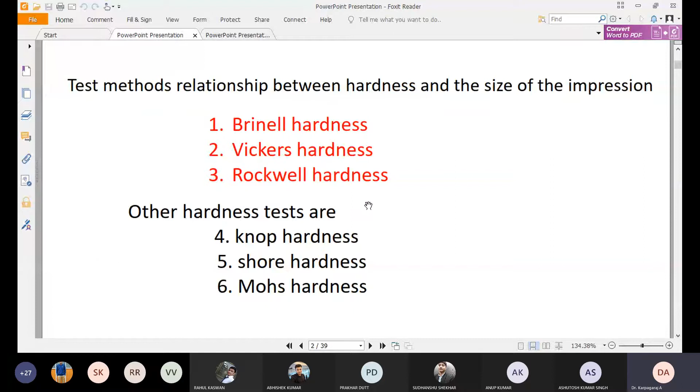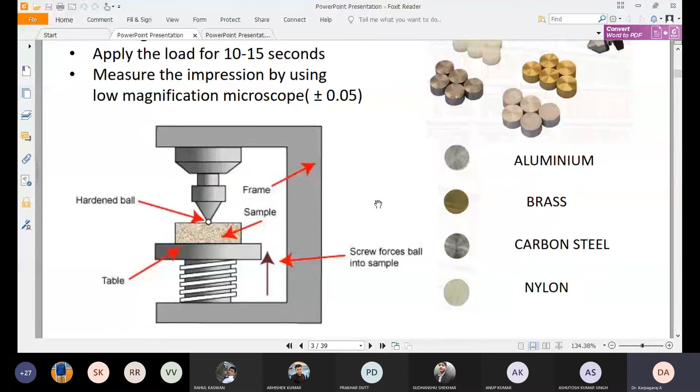So, Brinell hardness, Vickers, Rockwell, I think you have performed in your lab. For Brinell hardness, we have the load setup, and a small table which can rise and go down. On the table you have to put the samples. Then we have a small ball which is a carbide tool, because we need a hard material so that the ball will not be damaged or deformed when engaging with aluminum, brass, and other materials.

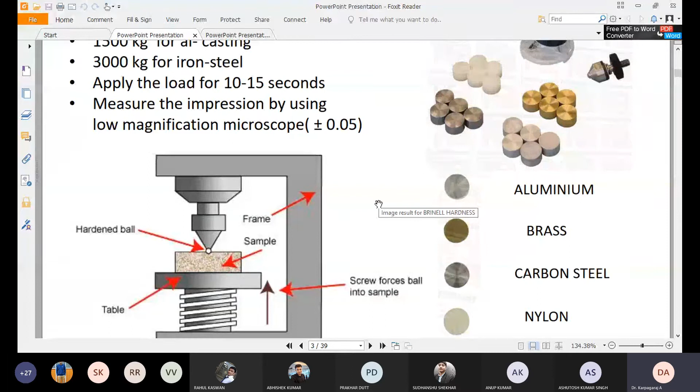So, by placing the ball for a certain time with respect to the load - for soft material you can use 500 kg, for castings and other things you can use 1500, but for harder material like iron or steel, you may go for 3000 kg.

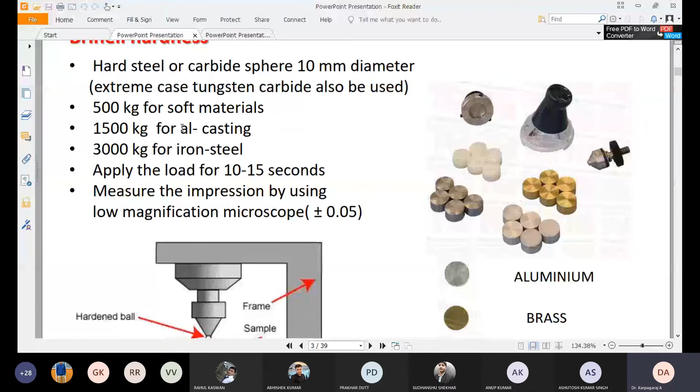It depends upon the material, and the dwell time is how long we have to keep the load for a certain time. If you keep the load for too long, it will penetrate much more and the diameter may change, because after making the indentation you have to measure the diameter using the eyepiece or microscope. Then you check the diameter, and slowly put it in the formula to get the hardness.

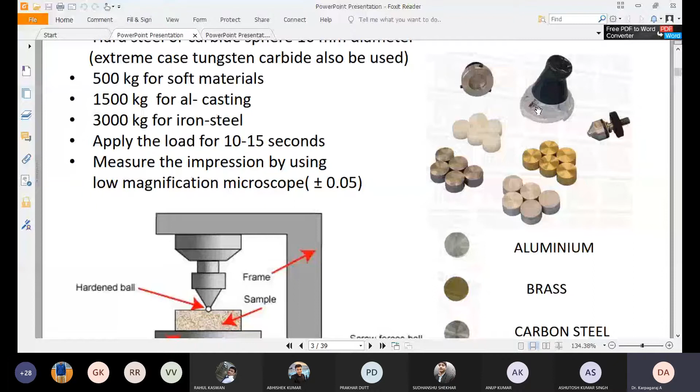This is a small idea: D is the diameter of the ball, F is the applied load, and D1 is the diameter of the indent - after reaching the surface of the product, how long it was dwelled, and how much was penetrated, that's the new diameter D1. So just put it in the formula: force divided by D times bracket D minus root of D squared minus D1 squared, and you will get the Brinell hardness number.

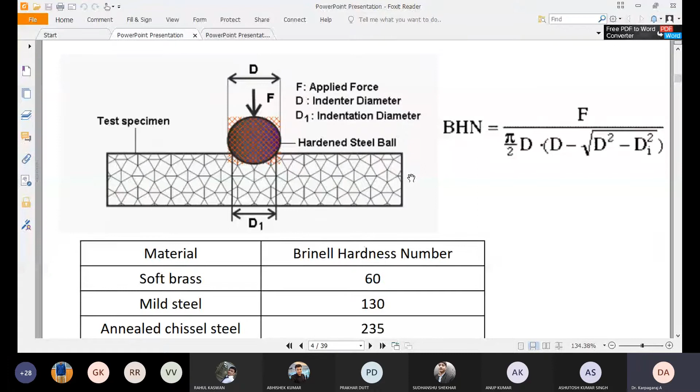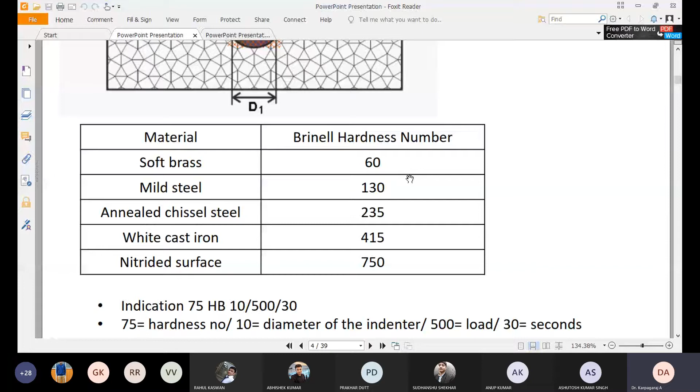There are some standard hardness numbers available for certain materials, and if you are measuring the hardness for your material, just check whether it's coming out correct or not. That's also one of the exercises.

So we have to write it like this: 75 HB 10/500/30. That means 75 is the hardness number, there's no doubt. 10 is the diameter of the indenter, and 500 is the load you applied. 30 means how long you applied it - 30 seconds. It depends upon the material, and it's a standard procedure for how you write the hardness number.

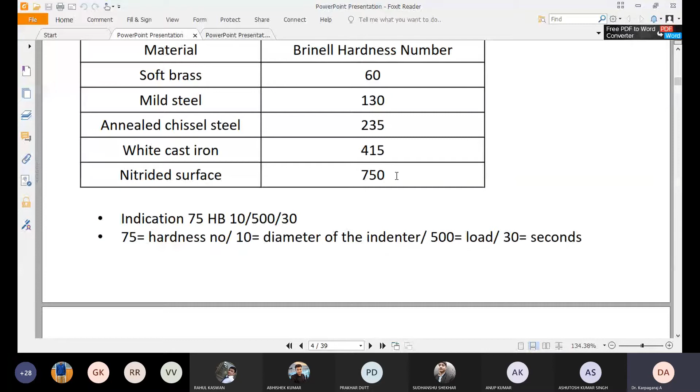For example, if you are writing the tensile load or other things, you will put MPa, megapascal, right? Similarly, you have to write like this for Brinell hardness number.

For measurement, sometimes if you don't have any analog devices, you can directly engage a specimen in the computer so that you get a computerized image, from which you can measure the diameter accurately.

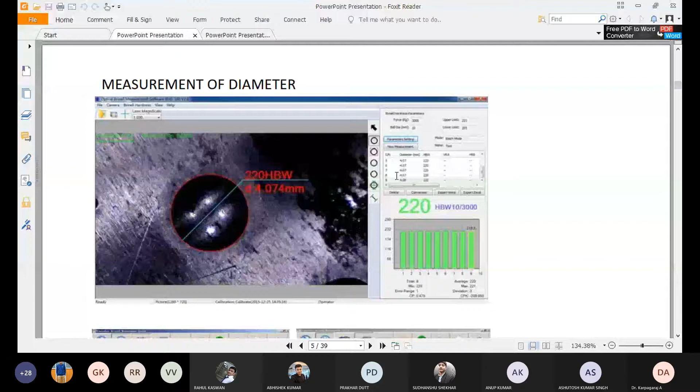So, is the Brinell hardness number test working in our college? Strength of materials lab - did you make it or conduct it or not? Yes sir. So what hardness number tests have you made? Sir, it was conducted last year, so we forgot. Oh, last year you forgot. Okay, very nice answer.

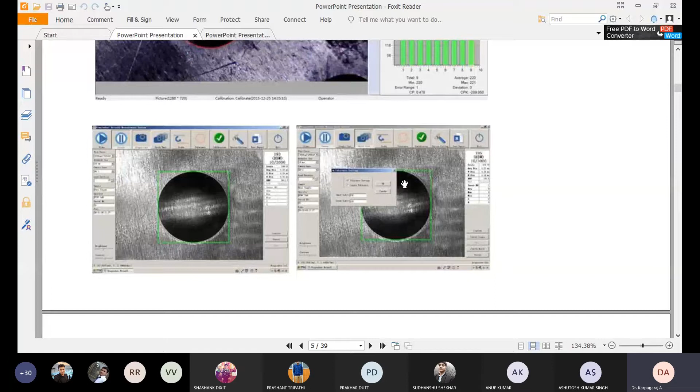So if you are unable to measure the diameter, you can make rectangular boxes and measure the side of the boxes, which will give the diameter. That option is also available in the optical microscope - you check feasibility and take it out.

So why are hardness numbers measured? Where do we measure, and what is the significant outcome and implementation of Brinell hardness numbers? Here in the example shown, it is an induction hardened sample - most probably a gear tooth.

In the gear tooth we need a hard surface in the outer layer, not the inside layer, because gears are rotating parts, and rotating parts generate vibrations - like in automobile, suddenly we engage some gears with another, and heavy vibrations take place. If it is so hard, it means higher wear resistance, so that's okay. But what about the low transmission capacity?

Higher the hardness means higher the brittleness. So if vibrations or shock loads are given, it becomes number of pieces - they cannot withstand the applied load or shocks. So for that we need a soft core, but outside should be rigid and brittle.

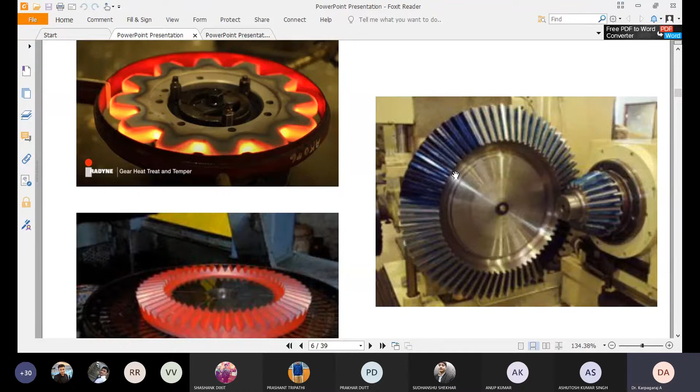Inside it will be soft, so sudden loads, vibrations, shock loads - anything that happens can easily transmit from one place to another without becoming a crack or causing defects. For this mechanism only we are checking the micro hardness at this surface level only. If you want to see the micro hardness for a particular section, you have to extract the section from the component, then measure the hardness.

So next is the Rockwell hardness. In Rockwell hardness, there are two things to remember: we have major load and minor load. In the minor scale, first we have to make it - like in drilling operations, before we drill, we have to make a punch. After that only we pass the drill.

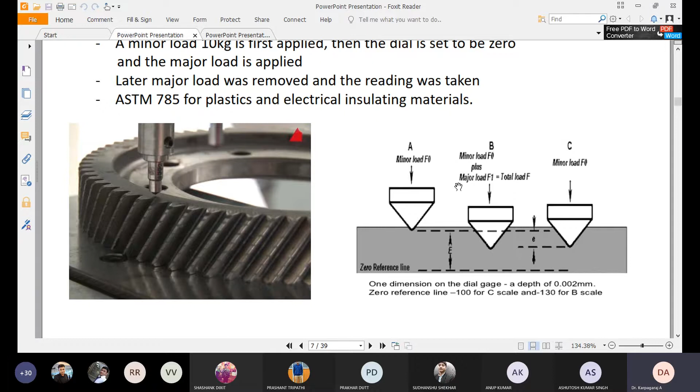Similarly here, we have to apply the minor load. After that, at the same location, same pinpoint, we apply the major load. Then we find out the depth e, put it in the formula, and we get the result. The ASTM standard is 785 for plastic and electrical material, don't forget. For metallic materials also we have ASTM standards, go and find it. Otherwise I will simply ask for ASTM standard based outcomes, and that time you may be in trouble.

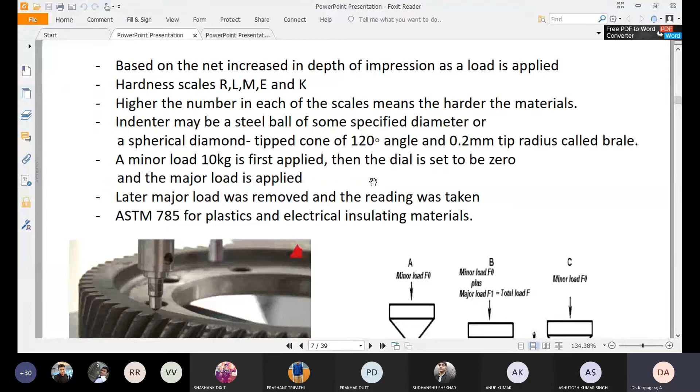So we are using a diamond tip. Last time we used the ball, but here we use diamond tip, with an angle of 120 degrees, that's it. So we have the scales R, L, M, E, K. These are the scales we will see in upcoming slides - what are the scales and other things.

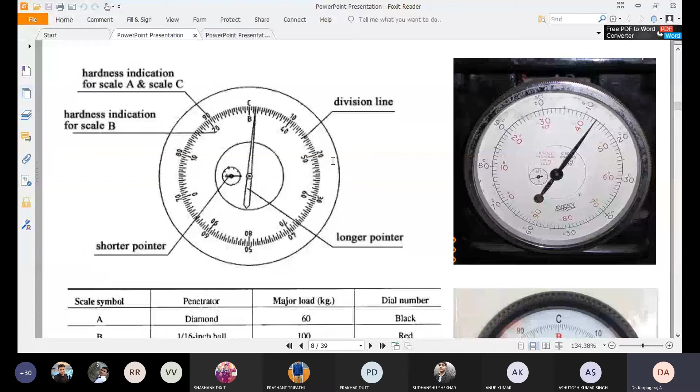And here only you can see A, B, C - the divisions will be over here. One will be minor, another will be major scale. As you can see, one will be in red color, another in black color - outer scale and inner scale, minor scale. Basically, you can take, no problem.

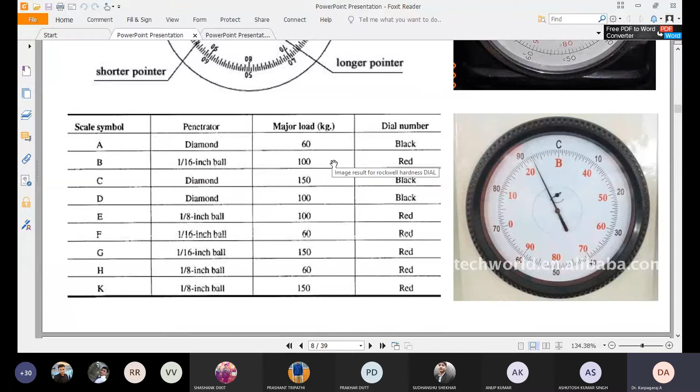Then depending upon the penetrator and the load capacity, you can take which scale you want. Because the load applying capacity and the indenter and everything is based on the material you're going to test. We are not going to fix it, the material is going to fix it. You have to select the proper choice for the material, otherwise you will not get the exact hardness number.

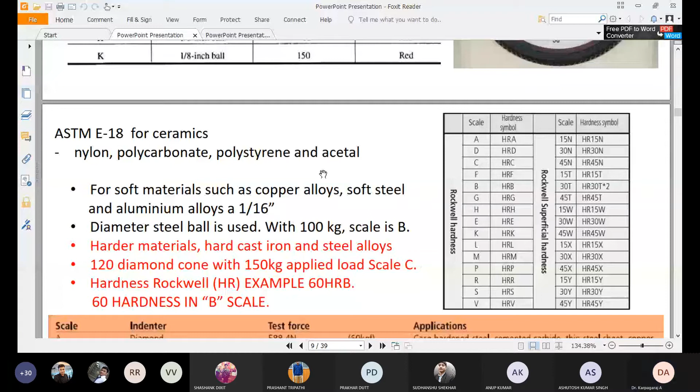So if you are using scale A, it's HRA, hardness of Rockwell A. D means HRD, C means HRC, likewise it will go. If you say scale 15N, it means HR 15N - that number also you can put in. Like last time, some numbering items, we have to do. And the scale, indenter and their scales are given, test force, the standard one, and the applications are shown over here.

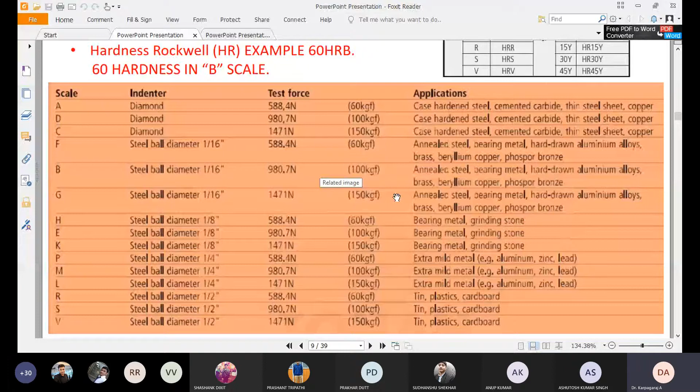Maximum that is 150 for annealed steel and other things.

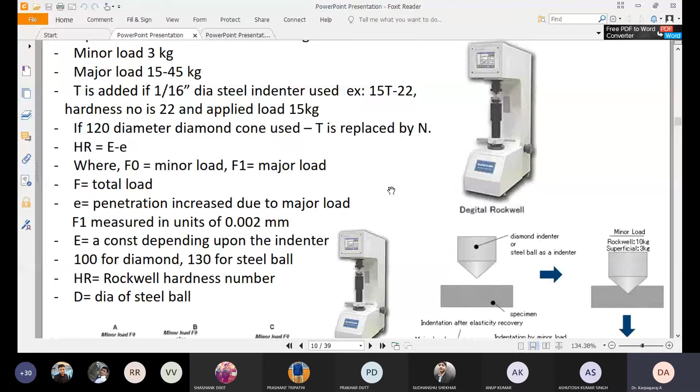The same, a little bit advanced version - here also we can have computerized Rockwell hardness machines where we can directly measure the hardness after giving the indentation. First you give the major load, minor load and other load conditions. Only thing is, we have to raise and lower the bed - just place the sample, raise the bed, put the items in the control panel, and slowly it will take the reading.

Now the third one is the Vickers hardness machine. In the Vickers hardness machine, we are using a diamond indenter. The load capacity may be 1 to 100 kg if they're saying, but normally it will start from 50 g up to 500 g we can apply the load. Dwell time may be 10 seconds to 30 seconds - I have used that, but if you want, you can increase more than that also. This Vickers micro hardness is specially used for industry purposes.

The previously seen method is normal hardness testing, used in school, college level and normal purposes, academic purposes. But for research and industry level, we have to use R&D level, the Vickers hardness machine, which gives a clear-cut relationship with the microstructural changes, grains and new phases, etc. Because previously what we've seen is macro level, not micro level, but this is micro level.

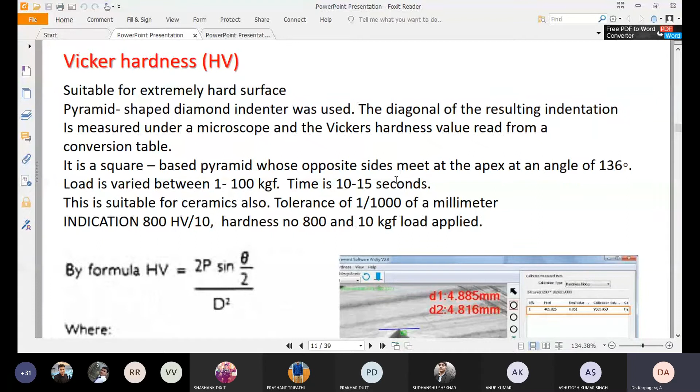Because what we're going to do is measure the diameter diagonal. The diamond indenter is like a pyramid shape. So diagonally we have to check D1 and D2, and then put D1 and D2 into the computer or pre-defined program, and it will give the hardness. Next slide you will see the effect of diagonal reading in the micro hardness.

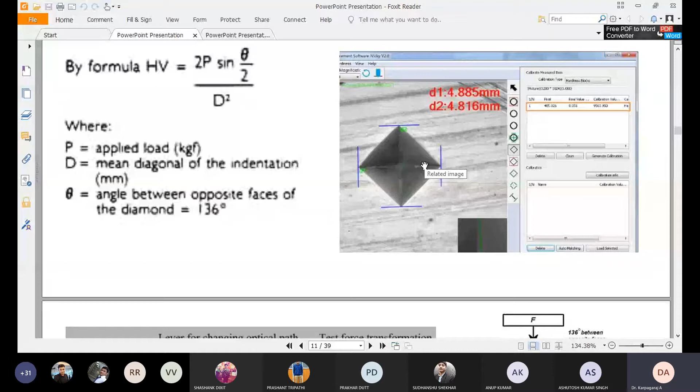This is the Vickers hardness micro hardness machine. We have a table and two XYZ movement screws. This is for load applying, power plug, and working platform. Hand wheel is for changing the load. Another hand wheel is for raising and lowering the bed.

With the same machine, if possible, you can change the diamond indenter. Sometimes you use Vickers, another may be Knoop. Digital screens are available. After taking the micro hardness, you can measure how much diagonally D1, D2, using the optical microscope lens already attached to this machine. After that, you have to enter the D1, D2 values in the controlling working panel.

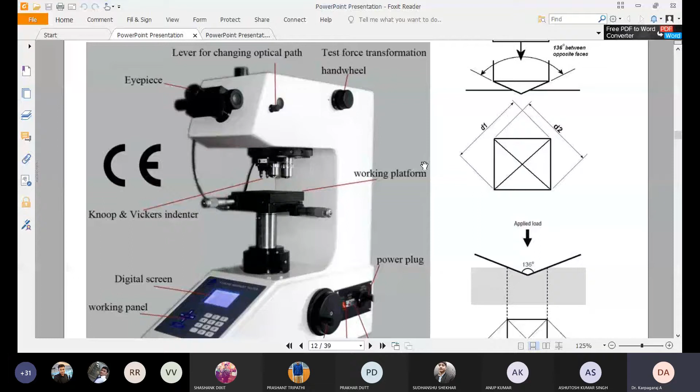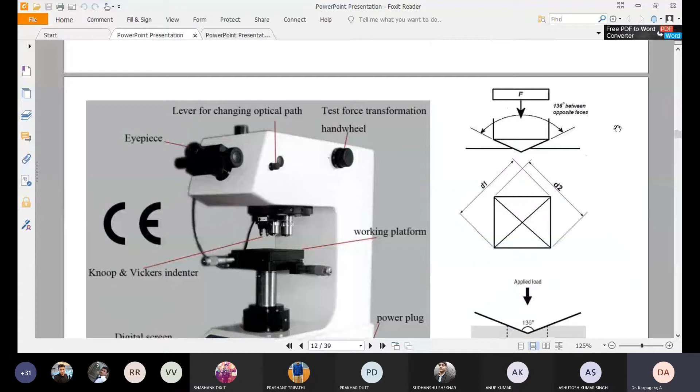Then it will give the micro hardness value on the display, and you can directly measure it. This is how it works. On the right side, F is available, so the diamond indenter at 136 degrees penetrates the surface. Then we measure D1, D2 using the optical microscope, take the D1, D2 values, and apply them.

Let us take one small case study. Here we are making a dissimilar metal joint. One is aluminum, another is steel. In the steel we are taking the interface, then we are going to check.

First, for the same material, the load carrying capacity and dwell time are known, but for new material we have to identify them. So what the researcher did: they took 200, 300 grams of load, dwell time of 10, 20, 30 seconds. So they made nearly 9 trials.

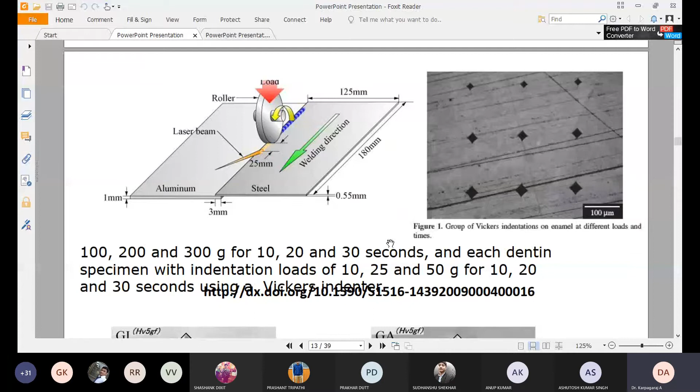As you can see, the interface of aluminum and galvanized iron is shown over here. In the aluminum, the indenter was somewhat big because it is a soft material - for a particular time, it can penetrate more. So the diameter of the indenter diagonal is so much bigger.

But galvanized iron is a little bit brittle compared to aluminum, so the indenter is unable to penetrate much more. The size of the indenter is very small, but in the interface new intermetallics are produced. Due to that, they are unable to penetrate much more - they are so heavy, more hardness, so they are unable to penetrate. So the indenter is very small in shape, giving 940 HV. If you see the aluminum, it's 94 HV, nearly 10 times higher than the base metal.

This is very important - even though you know the material, you should select the proper dwell time and load. If the penetration is not perfect, it will become very small amounts. You can easily tell the hardness is high, but it's not true, because you are not referring to the ASTM standards. So whenever you check the load, check the ASTM standards for that material and what is the dwell time.

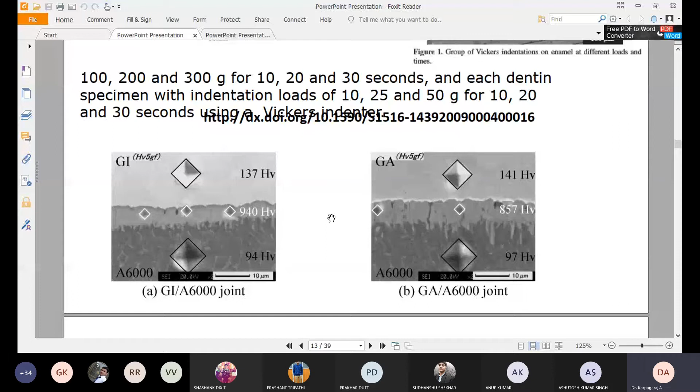What is the load carrying capacity, etc. Then you go ahead, otherwise you will get wrong details.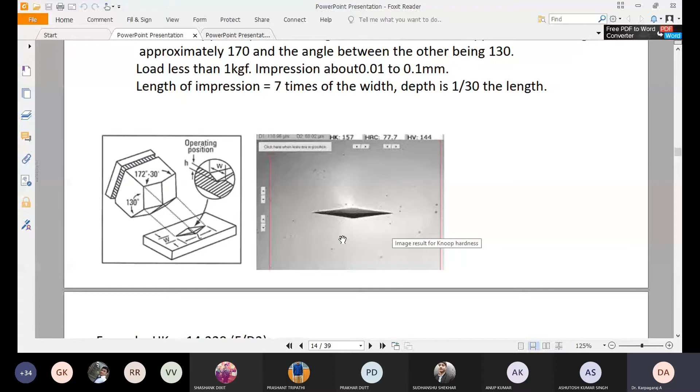Another one is Knoop hardness. It's nothing but a modification of the Vickers hardness. Here also we used a special type of diamond indenter, but it was different than the Vickers hardness. The indenter was somewhat leaner compared to the previous one. The previous one looks like a pyramid shape, but this one is not like a pyramid, it's somewhat different shape.

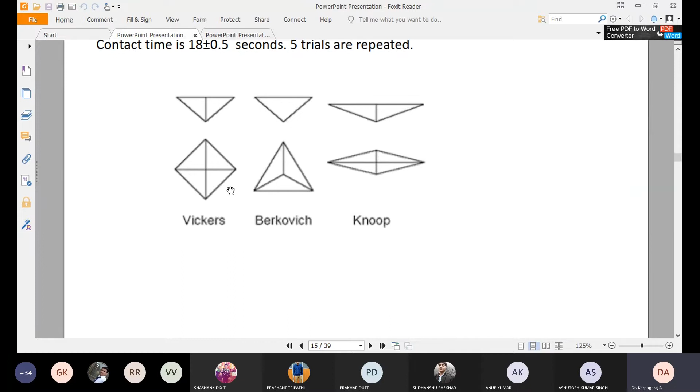So we follow the same procedure for Knoop hardness also, using the same material and type. This is Vickers, Berkovich, and Knoop. You can see how the tools look in the front view as well as the indentations in the top view.

So Shore hardness is used for soft materials. It's nothing but, for example, rubber and other things, when you are checking that hardness, we use this hardness tester.

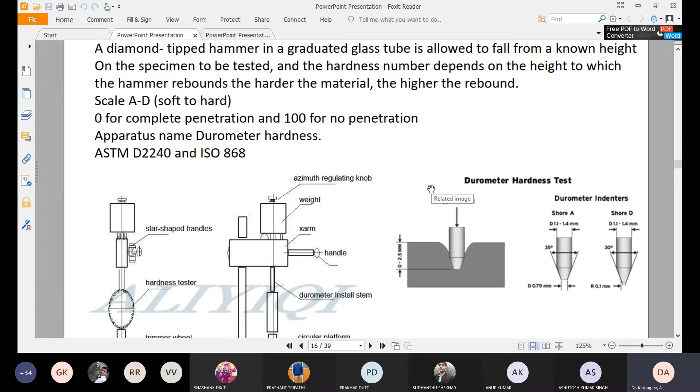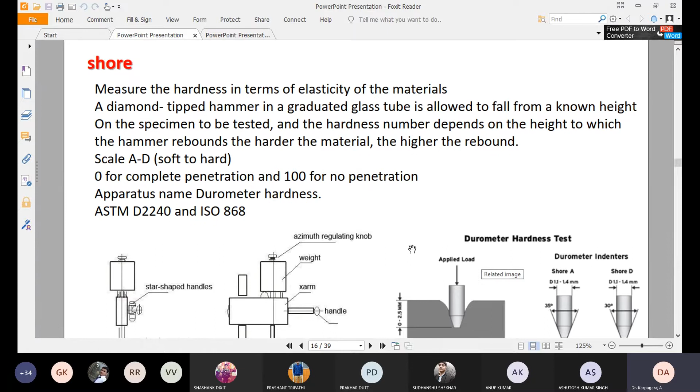We have the ASTM standard D2240, or ISO, you can take either, no problem. 0 means complete penetration, 100 means no penetration. So here, nearly 75% is taken. This is very important, when you go to the next slide you will identify the importance.

Most of the time we use it for jelly, candy and other things. It should be checked properly, and also for rubbers, tires, shoe materials, shopping cart wheels, to identify that hardness. We cannot test these specimens with Brinell, Rockwell, or micro hardness methods like Vickers and Knoop. We need some other scale, so we use this material and procedure to check it out.

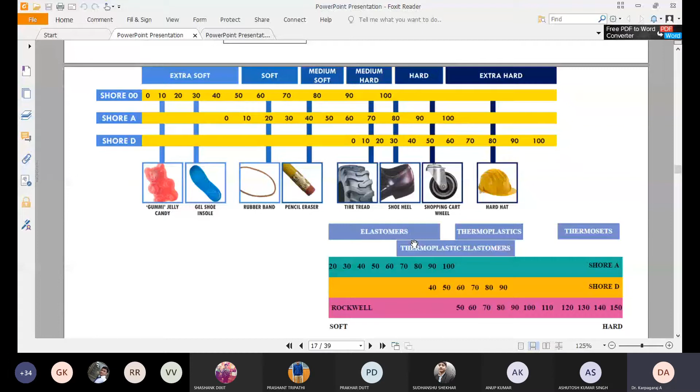0 means very soft, 10 also soft, and maximum 80 to 100 means hard. So we use the scales to check whether the material is in the plastic limit, elastic limit, or harder. It has some more applications. Depending upon the material and surface, you can change the indenter: flat, spiral, hemispherical, cone, etc.

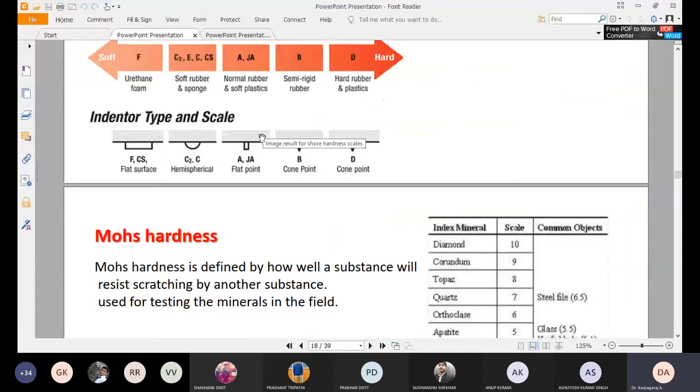So Mohs hardness, this is the number. You can see diamond is 10, talc is 1, fluorite is 4, and based on this number only, we classify what is called the tempered glass hardness. Those things are classified with respect to these numbers only.

So suppose if you have the number 8, means if your tempered glass is produced with number 8, 8D or something, then materials with numbers up to 7, 6, 5 cannot damage your tempered glass. So the higher the number, the higher the security, that's what they say. Previously it was 3, 4, 5, 6.

Nowadays it goes up to 11, 12 also. That means more wear resistant, the tempered glass may be resistant to more materials.

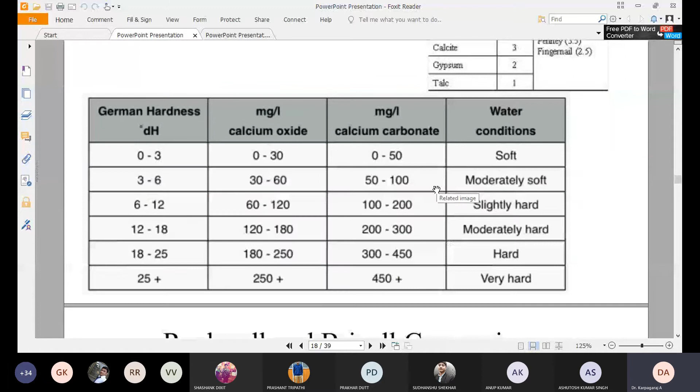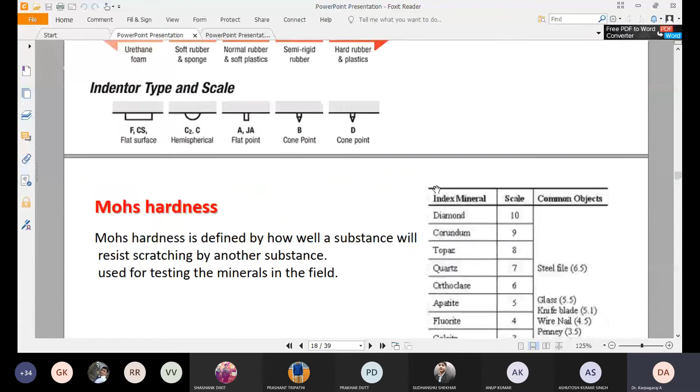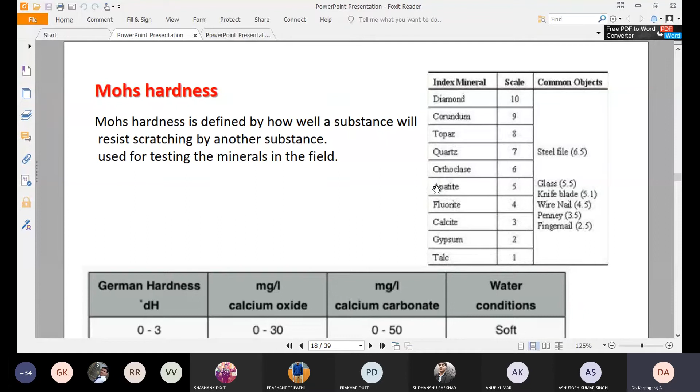So they use some particular material to wear out part of another base metal. After some time, they check how much material has been removed, and based on that only they check the Mohs hardness. It is called German hardness machines or something similar.

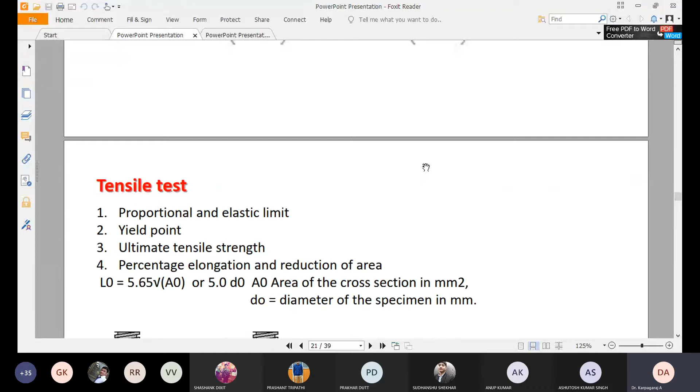So, conversion of one hardness to another hardness, these are some formulas, go through it. And for the tensile test, you engage your specimens.

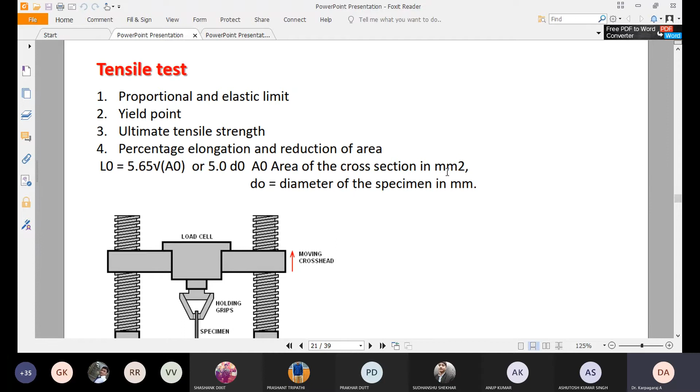So proportional or elastic limit is first, then we have the plastic limit, then ultimate strength, then after that, if you still give the load, fracture will take place. Remember this will be the layout of tensile testing machines.

The specimen's bottom side is the stationary one, it will not move anywhere, and the top side portion only moves up and down, rise and lower, depending upon your sample. Then we can load it.

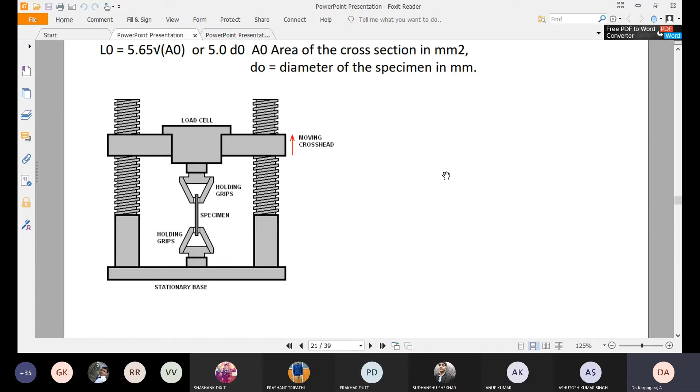So we may have different grips with respect to different specimens: flat specimen, round, some complicated shapes, whether you're testing biological samples like tissues or papers, single fibers, rubbers, etc. We have different grippers for different specimens.

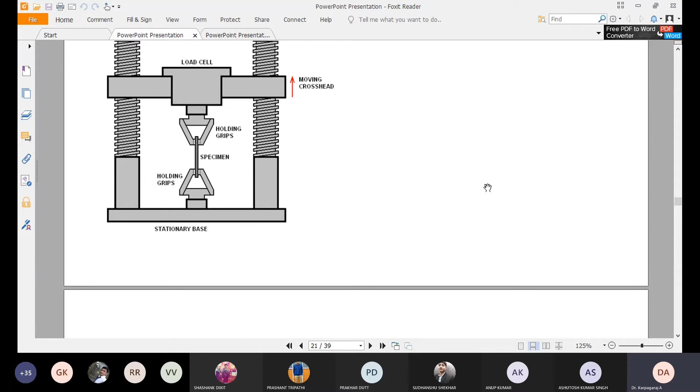These are all the basic terminology you should know, most probably you may already know these things. So these are all the observations we can take from the tensile test.

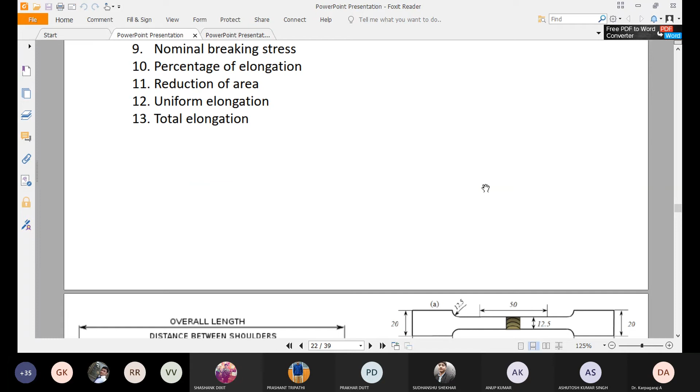Okay, so for tensile test also you cannot simply engage your specimen as you've seen in your laboratory. For laboratory purpose, academic level, they just simply put the mild steel and conduct the tensile test. But for actual level, you have to follow the ASTM standards, E8 or something.

And this is the specimen, how it looks like. It looks like a dog bone shape. Yes, the specimen is always called a dog bone shape tensile specimen, except composite material. Most of the metallic materials are prepared like this only, okay, as samples.

In these ASTM standards, they will never give the values of the overall length, grip section, etc. They simply give the thickness of the sample. With respect to thickness, they have some small formula for overall length, this much into thickness, distance between the shoulder, the thickness. So everything is based on the thickness.

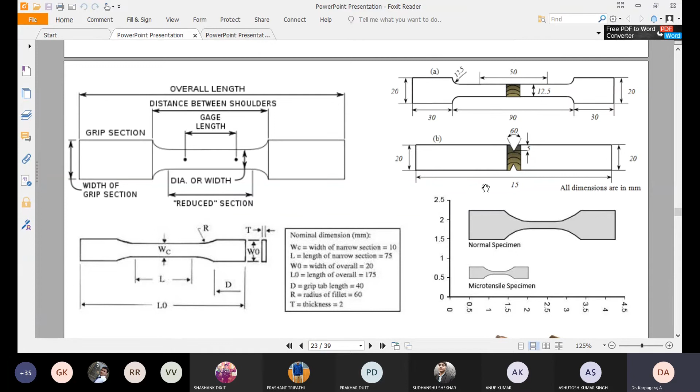You have to clearly mention which ASTM standard you have followed and what is the thickness and the calculations. If this much is the thickness, what is the overall length, the shoulder length, and the grip length or gauge length, etc. Not only for flat specimens, you can make the same thing for cylindrical shaped items also.

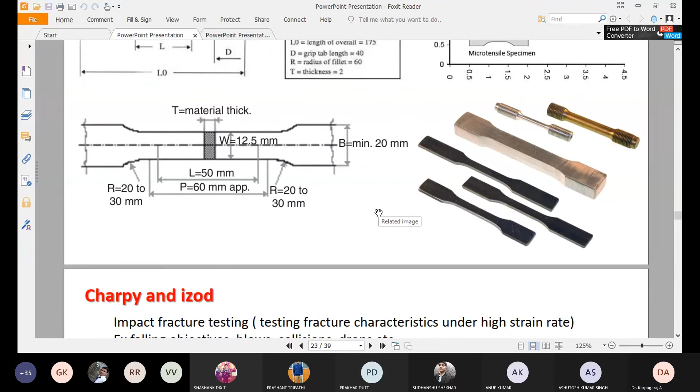So some more specimens, as you can see. So Charpy and Izod impact. If you are placing the specimen like the letter I, that is Izod. If you are putting the specimen in flat condition, that is called Charpy. So we are going to make the V notch, 45 degrees, I think.

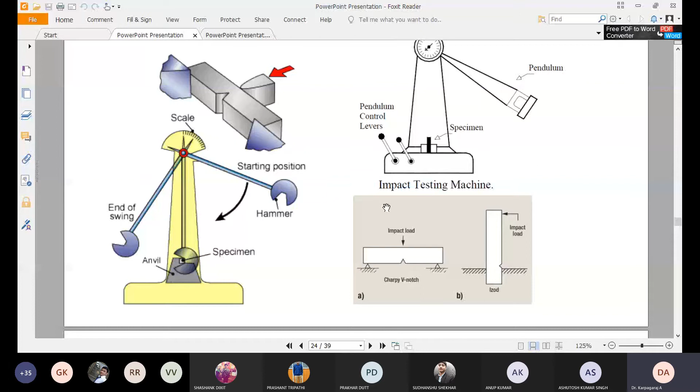Then we have to release the dead weight. So how much energy is absorbed before the break, or near the break, will be indicated on the scale, and we have to take the energy in joules. Here the output is energy, in terms of energy, that is nothing but joule.

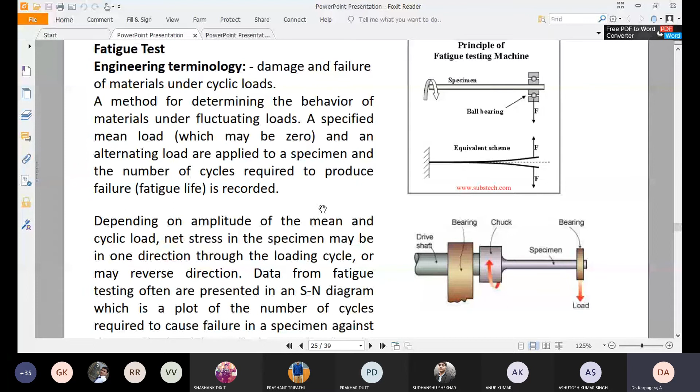So, fatigue test. We are going to give a cyclic load. It's not up to the fracture load, the ultimate load. We are not going to reach the ultimate load only. We are going to give a fluctuation of load, which is also very severe. We have different types of giving the fluctuation load. Depending upon the load, it's going to break. The breakage may differ with different sample types, but the breakage may look like some of these examples.

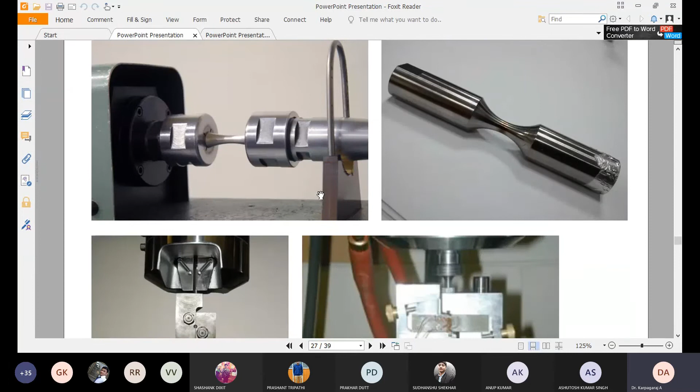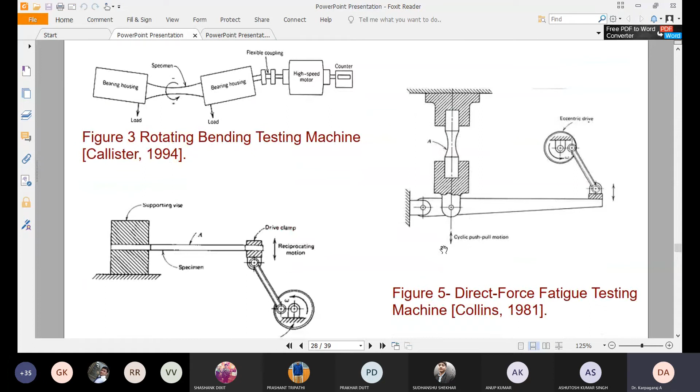How the fatigue fracture specimen is prepared, and different fatigue loads can be applied as shown here. Different machines give some force and repeat it back slowly. These are all terminologies for fully reversed loading - meaning if you are giving 50 kg of load on one side, the other side also gets 50 kg of load.

A repeated load means just above zero - remember, just above zero. We are going to start from a certain level and reach up to zero, then reach the previous level. And a fluctuating load means there is no such fixed measurement - we can go up, but it's not going to touch zero. It's always going to stay above zero.

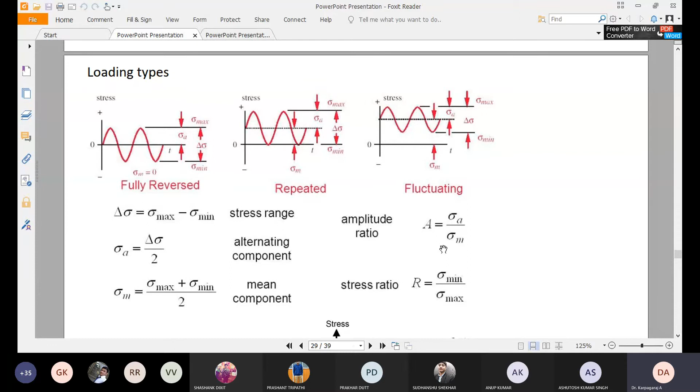So the stress range, amplitude, mean - those things you can easily calculate from this formula. So here are the stress cycles.

Remember, unlike tensile and other tests, fatigue failure always starts from any one surface. Assume you have a thin wire in your hand and you're going to break it into two pieces. The simple way is we give a force up and down, we can give it as a load. So it will start - the crack will start from any one corner, then it will propagate and go.

So the fatigue propagation - first the initiation of the fracture, then if you keep giving the load, the crack will propagate and fatigue propagation will take place. Then we go for catastrophic rupture.

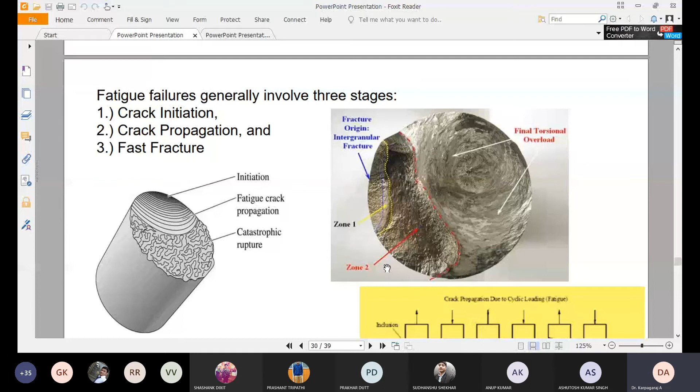After the breakage, if you see the specimen, it will look like this, as shown - the first one is yellow in color, zone 1, fracture origin; the second is red color, zone 2; and the final one is the fracture. As you can see in this diagram, now you get information on how it happens. Initially the fracture takes place, so a small crack will start at the surface. Then, in the negative cycle, when you give the load, it will not propagate.

Then again we are going to increase the positive load, so the crack will be more. Then again negative load, so there is no fracture. Again we give another positive load, so fracture will be more. So likewise, fracture will take place only under fatigue load.

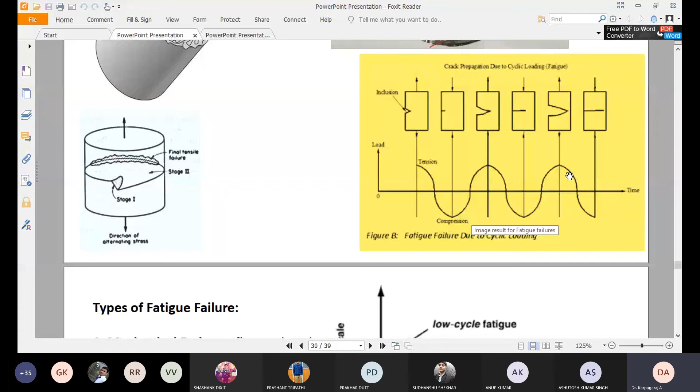So the types of fatigue are mechanical, creep, thermomechanical, and corrosion. If the fatigue specimen is tested under corrosive environments, it is called corrosive fatigue.

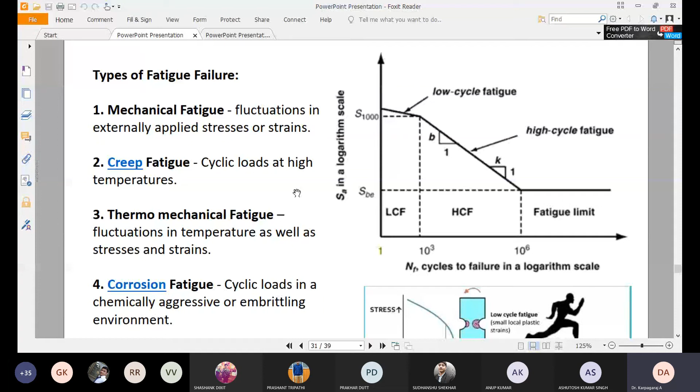Thermomechanical fatigue applies to components like engine cylinders and pistons. For creep fatigue also, we give high temperatures and check the fatigue life. Mechanical fatigue is always present everywhere, combined with frictional and sliding loads, such as in boilers and pressure vessels.

Before that, we will make some arrangement. So there is low cycle fatigue and high cycle fatigue also. We have two types, and we will see them in the upcoming slide.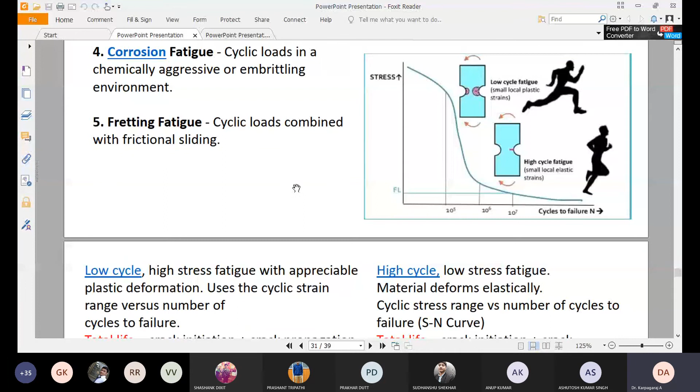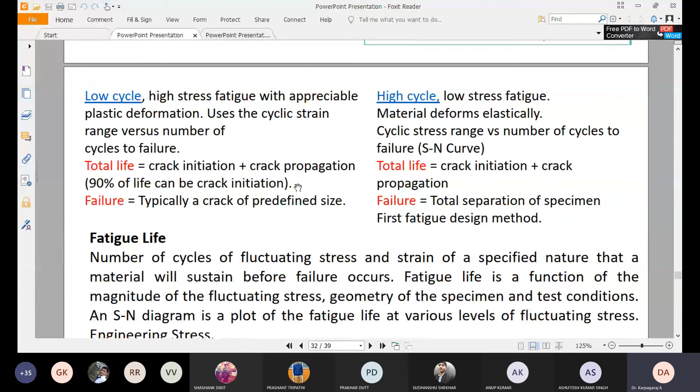Low cycle fatigue means high stress fatigue with plastic deformations up to a point. The total life, about 90% of it, can be crack initiation before that, but for high cycle fatigue there is no such information.

So fatigue total separation, for the first fatigue design method, we have to check. Fatigue life is nothing but before the fracture, how much life it is going to serve, meaning how many attempts without any breakage it sustained.

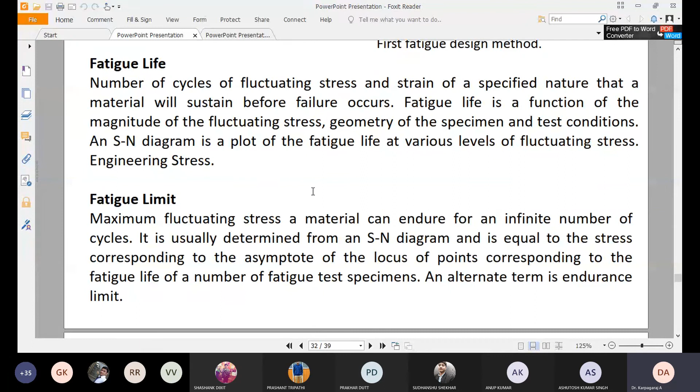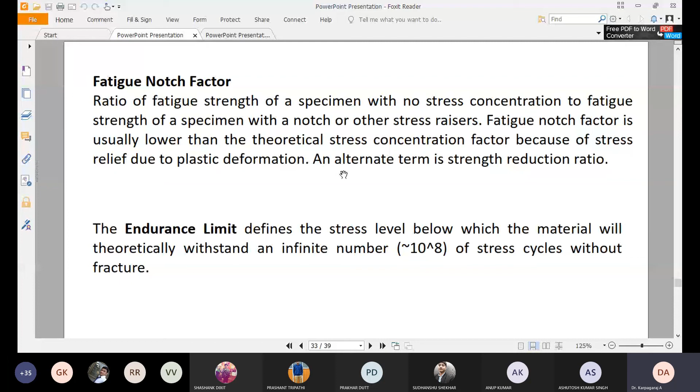That is what we call S, and stress versus number of cycles is what we measure, which is called the S-N curve. Not only with one specimen, we test some more specimens, then only we can check. Fatigue notch factor means we make the specimen with a notch, then we check the fatigue the same way.

Creep is nothing but a constant load given for a prolonged time with some temperature. In cases like nuclear power plants, if you are developing materials that cannot take it easily, they will go for creep testing, because the nuclear power plant operates 24/7.

Every time power generation happens, heat will be liberated, so the specimen should withstand it for 6-7 years. So they will do the creep test for the nuclear plant component.

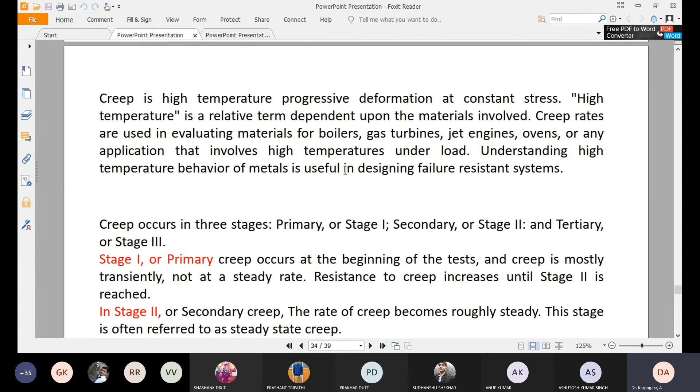They give some constant load and maintain some temperature, and leave it. Every time they take measurements of how much deformation has taken place, and whether any dimension changes have happened or not.

So we have 1, 2, 3 stages available. The first stage is the beginning stage, the second is the constant phase, and the third is the breaking phase.

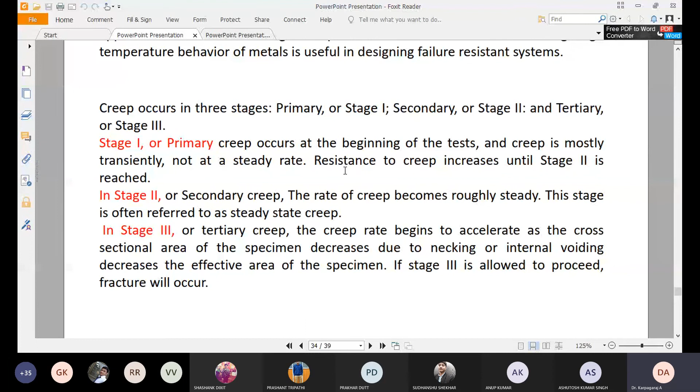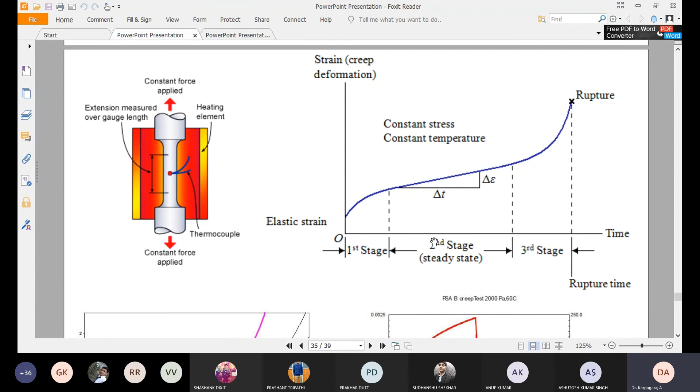Second is only the steady state, where there are no more changes in the structure, after getting one predefined change. The last one is the third stage, where rupture is going to take place. It's severe, we have to monitor every time to check when it's going to rupture.

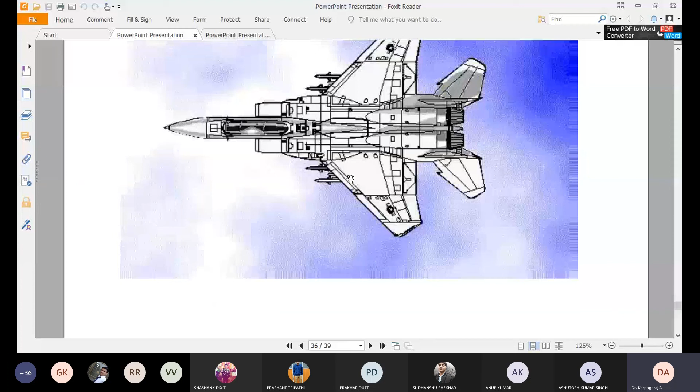So I have taken some typical curves for different materials, and creep happens inside the turbine blade. I think I have shown this to you or some other NIT students before.

So dear students, I have given some cases here. Someone please tell me what type of fracture it is, whether it's tensile, fatigue, creep, or any other type. Identify it if you want.

So, fatigue. Which one? The first one, or the second specimen? Okay, the second specimen with the blue color background. Yes sir. So what about the first one? Do you know the component?

The crankshaft, first one, do you know the component? The crankshaft, maybe. Okay, now tell me what type of fracture it is, under which load it was fractured?

Cyclic load, most probably. Okay, cyclic load means which one, which test? So it is also fatigue, I think so.

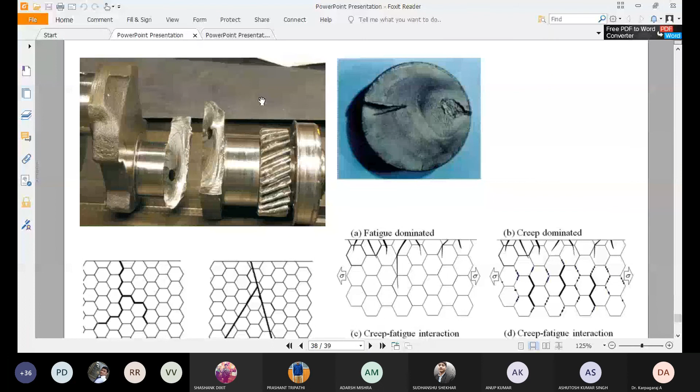So here, see, there are two small things I have shown here: intergranular and transgranular. At the micro level, if you want to see crack propagation, there are only two types. One is intergranular, where the crack propagates and flows along the grain boundary. Another is transgranular, where it does not bother about the grain structure and propagates along its own way. There are only two types.